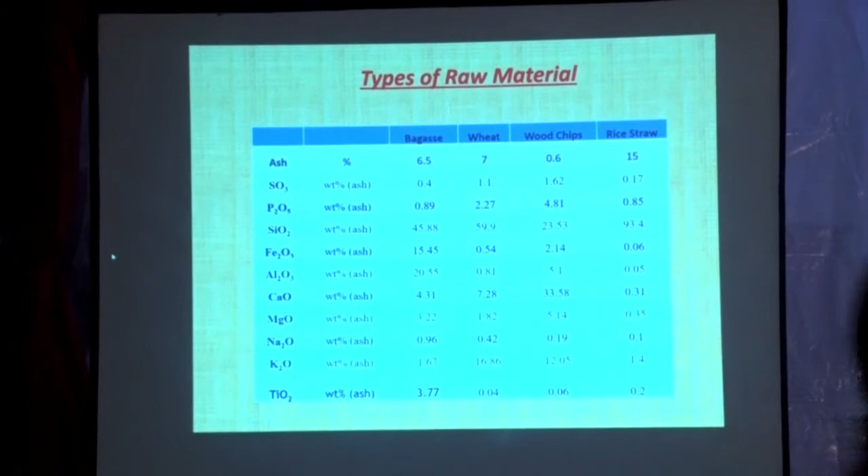These are the various types of raw material being used in the paper industry. This is the bagasse.

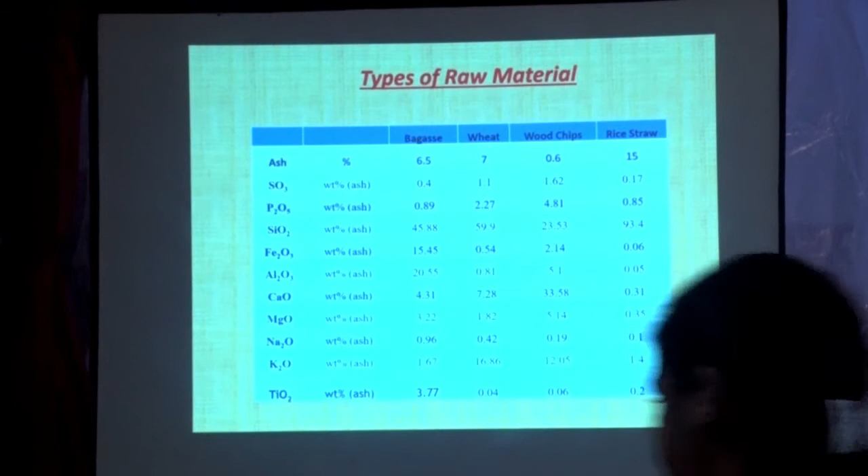So how can we judge which raw material is good and which is bad for the processing of the pulp? The lesser the ash content, the better the raw material, and the better the black liquor. But as we discussed just before this presentation, choosing a raw material is a strategic decision. We cannot think that we cannot bring softwood raw material here, because as we all know, softwood black liquor is best and good, and solid concentration is possible up to 85%. We can enjoy high steam generation from that. So we have to make the best out of the worst.

If you see the wood chips, ash content is only 0.6%, meaning 6 grams of ash content per kg of raw material. If you see the bagasse, it has ash content of 5 to 6.5%, meaning 65 grams per kg is the ash content. And if you see wheat straw, it contains ash content of 7 to 8.5%, meaning 85 grams per kg is the ash content.

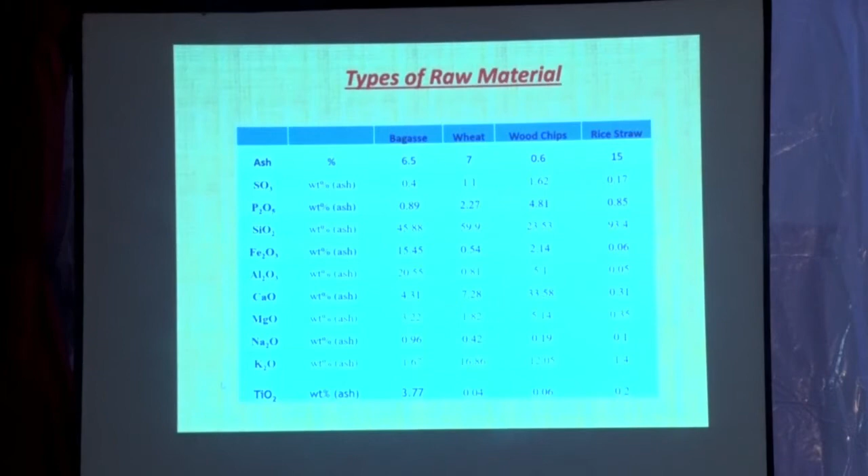These are various types of weak black liquor. Bagasse WBL TT is approximately 25 to 27 grams per liter, and in case of wood, it is 50.

RAA, this residual active alkali, in agro-based raw material it is mandatory to keep slightly high. Even in wood liquor we maintain slightly high residual active alkali so that high solid concentration is possible from the evaporator, and the goal is to keep fiber content as low as possible.

This is the Na2CO3 by Na2SO4 ratio. This ratio should be as low as possible if you want to achieve higher solid concentration from the evaporator.

This is the solid concentration, and this is the organic and inorganic content. This is the black liquor GCV, not the raw material GCV.

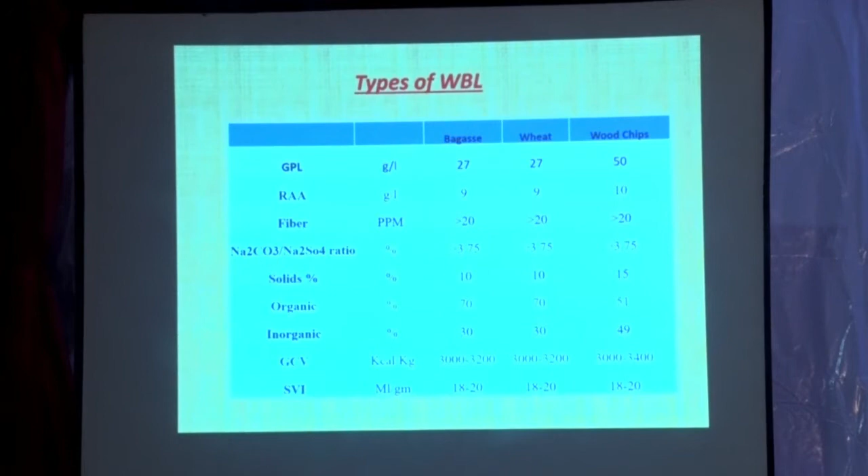If you see, usually when starting with wheat raw material, initially you get GCV in this range, but after 5 or 6 years, this GCV will drop to 2,800 kilocalories per kg. Sometimes we are surprised why this GCV has dropped, but it is nothing but due to the accumulation of dead load and non-processed elements.

Black liquor is a mixture of organic and inorganic. There is some inorganic which is desired, contributing to Na2O, but there is other inorganic which is not desired, like silica, calcium carbonate, and so many others, aluminium and other ions, contributing to undesired inorganic content.

These undesired elements do not contribute either to green liquor generation or steam generation, and must be purged out before they enter the cycle. If you are thinking of leaching out chloride from the ESP ash or other techniques available, we think it is not that sustainable, because our main objective is to get high steam generation from the recovery boiler side.

Though this is not the main subject to cover so much, it is very important for the economic viability of this whole topic. So if you see, in most mills, especially agro-based, 30% of steam generation is contributed from the recovery boiler, talking of the average paper mill.

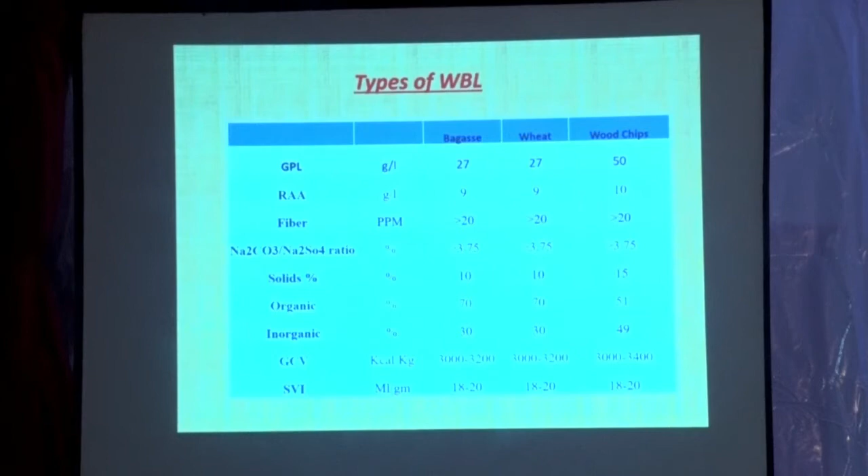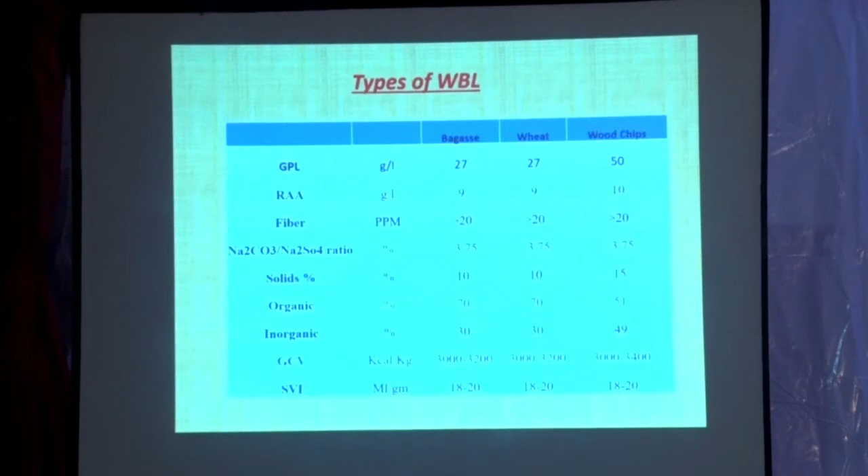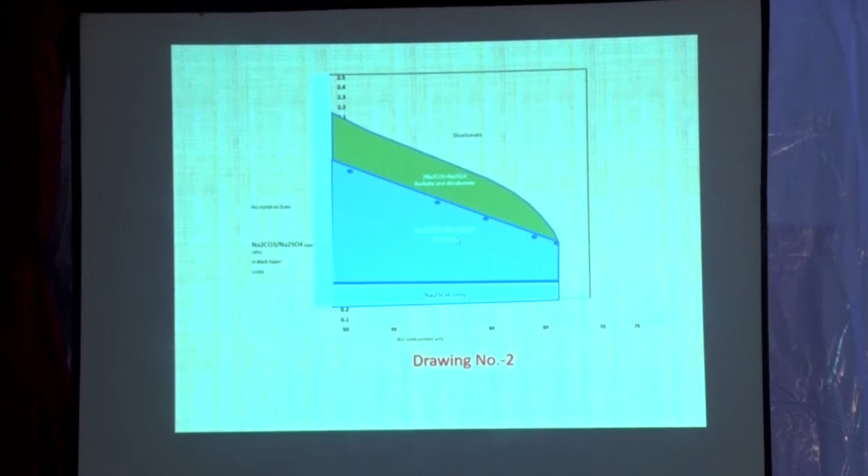So what am I saying about 95% causticizing efficiency? Most people think that if we increase the causticizing efficiency up to 95%, the obvious question that comes to mind is that the free lime will also increase.

So in the first stage, we react the green liquor with lime up to 78% causticizing efficiency. White liquor taken out from the CD filter or clarifier is again reacted with lime up to 95% causticizing efficiency. This causticized white liquor is taken out, and the underflow still has free lime, which is brought back into slaker number 1 to utilize the free lime.

So in this process, if you see, free lime is not carried toward the mud filter. Free lime is neutralized in slaker 1. So even the white liquor has this benefit.

Usually people say it is a reversible reaction and it will convert back into carbonate, but it is not such the case. If you are continuously removing the products, it won't reverse. It will only reverse when you keep it held.

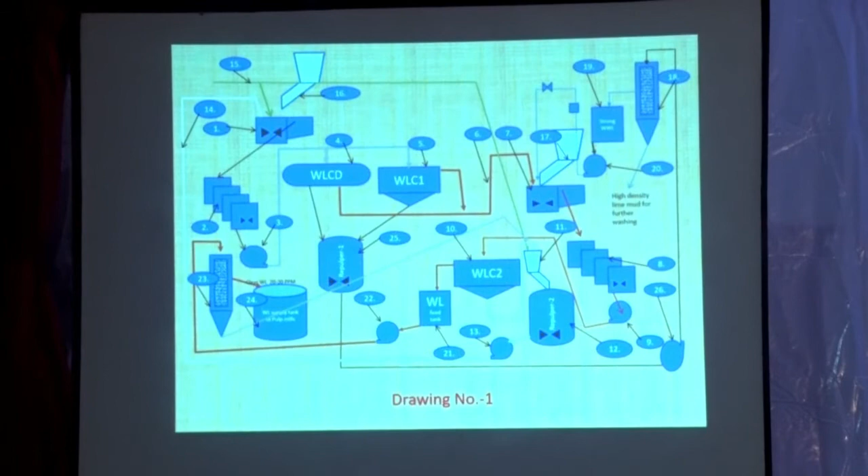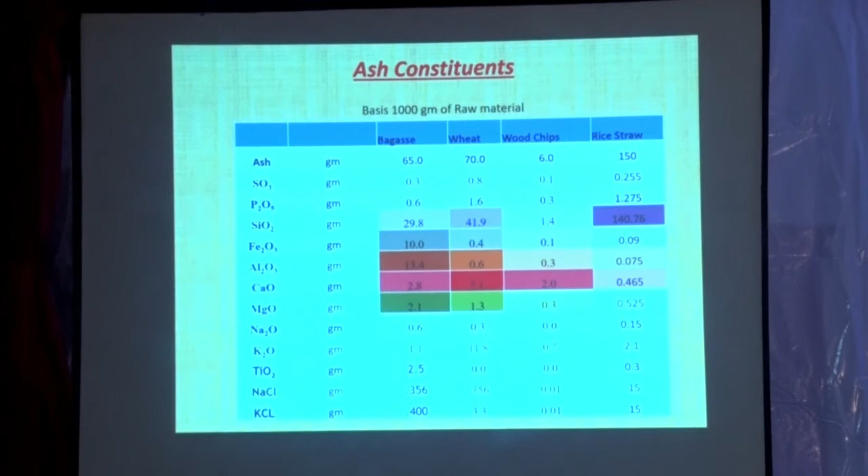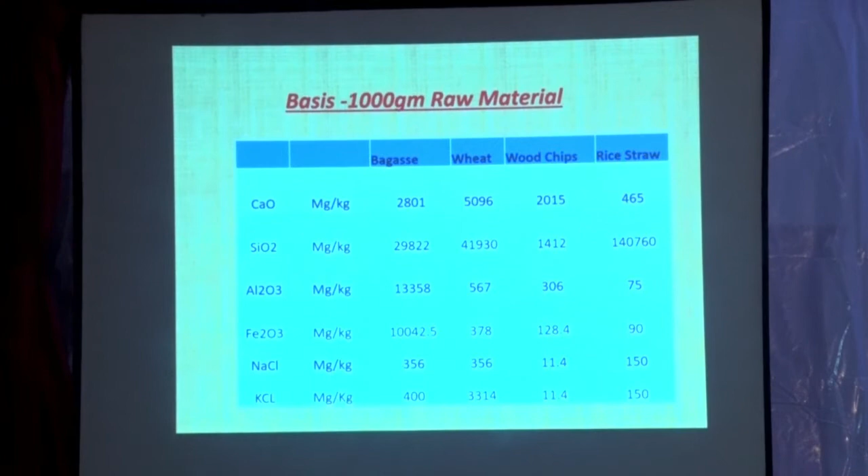Washing at 5% consistency needs water of 19 liters per kg of raw material.

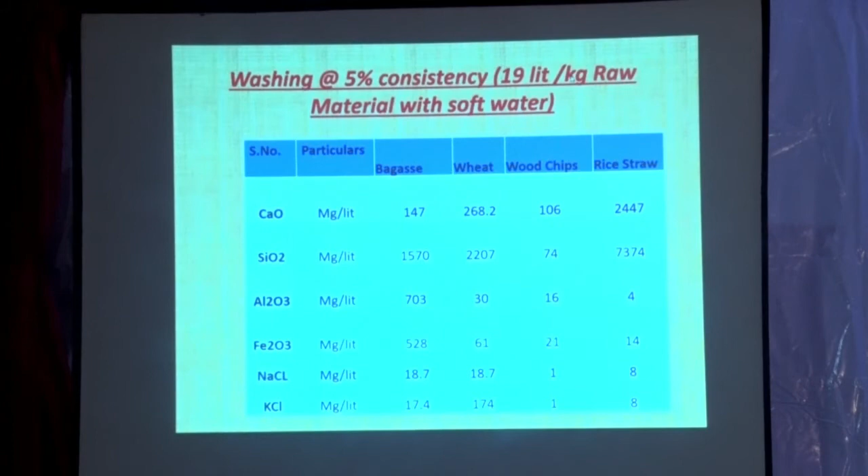Ultimate crux is that this is our process. Raw material is brought into the first separator. It has a strainer and agitation system, because as Dr. Dixit has told, calcium and magnesium have solubility even at 10 degree temperature. Ambient temperature is 30 to 35 degree, though it is a counter-current washing, the temperature will be approximately 65 degrees here. So most of the KCl, NaCl and grits, sometimes grit sand, usually come in with the raw material - it is removed here. The water comes here, raw material moves here, and water is taken here.

It is counter-current washing. In the second stage, we use weak green liquor - you can say drag wash or soda ash, DAX, we can add. We have to maintain 10 to 11 pH so as to react with all the calcium, magnesium ions, as well as chloride in the form of calcium chloride and magnesium chloride. Those reactions are missing here, but actually chlorides are in the form of calcium chloride, magnesium chloride - there are some free chlorides also. So after the reaction, calcium carbonate gets separated and is removed here before entering the digester. Because ultimately, if you don't remove the calcium content, it will go into the digester. After the digester, in the digestion, it will react with the free Na2CO3 coming in the white liquor, and it will precipitate out definitely. Better it is to remove in the washing stage so that it won't build up in the system.

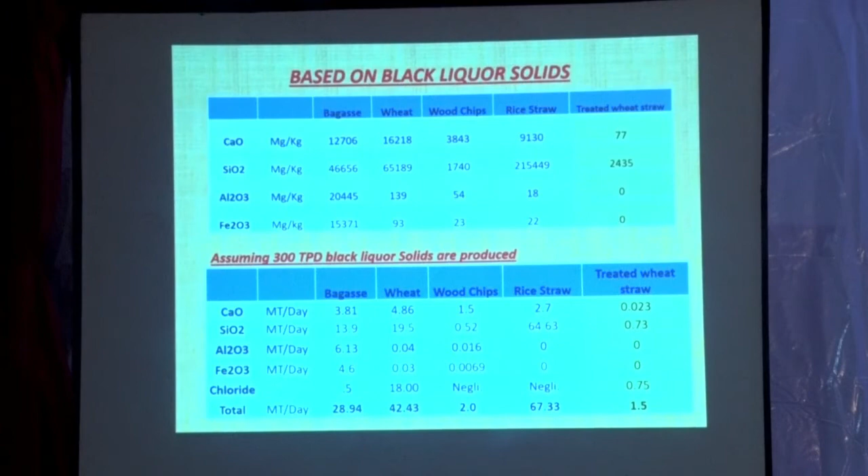Even then it is better than other raw material, because treated raw material itself is good. Except for silica, if calcium and magnesium are removed, the raw material is better, because it consumes less white liquor, less active alkali charge, and produces less solid. We are able to produce more pulp.

Ultimately, what is the worst, we have to make it the best. Because raw material scarcity is already there, and within 1 or 2 years I think there will be a ban on coal consumption totally, and we have to produce more steam generation from this renewable or this type of raw material. We have to think vigorously toward it.

We are in a patent process, we are under NDA with one of the Punjab-based agro mills, but we cannot disclose the name of the company because we are in NDA with them. Those people really want to have more discussion, and once their impact on operation comes forward to us, we will disclose all the technology.

In this process, regarding water, if you see the wet washing water - we are operating wet washing of 500 TPD wheat straw, approximately 80 cubic meters per hour water is going to the ETP. In our system, because we are using Na2CO3 and H2SO4 for neutralization, the water definitely has some COD as well as chemical content. But in our system, water going to the ETP will be zero.

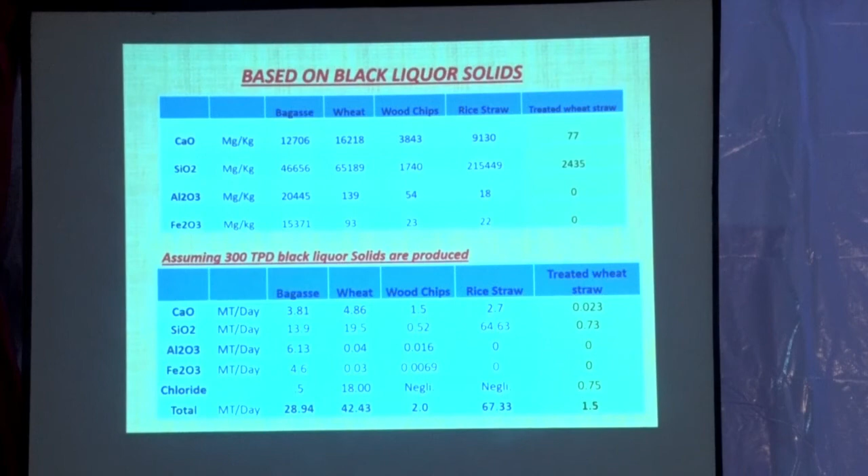This was the whole subject. I think you may have liked it.

Impact: Black liquor solid concentration is possible up to 75% easily after the treatment, provided proper RA and fiber content in WBL. Evaporator jamming frequency will be reduced, and downtime of the evaporator will reduce.

Silica in the raw material reduced to 1%, even less than 3.5%, means most agro paper mills which are thinking to run the lime kiln can now run it, because at 3.5% silica content in the lime mud, you can achieve 80% purity of the lime easily.

But I quite agree with Dixit ji, because it is just the boundary line. If you increase the furnace oil to get more purity, instead of increasing it will decrease, because the silica will bind with the calcium oxide and form calcium silicate, and you will find in your test results that we are giving more fuel but purity is getting down.

So the lesser the silica, the better the purity of the lime. I am quite in accordance with Mr. Dixit. So then clinker formation in the lime kiln will reduce, and makeup limestone requirement will also be reduced.

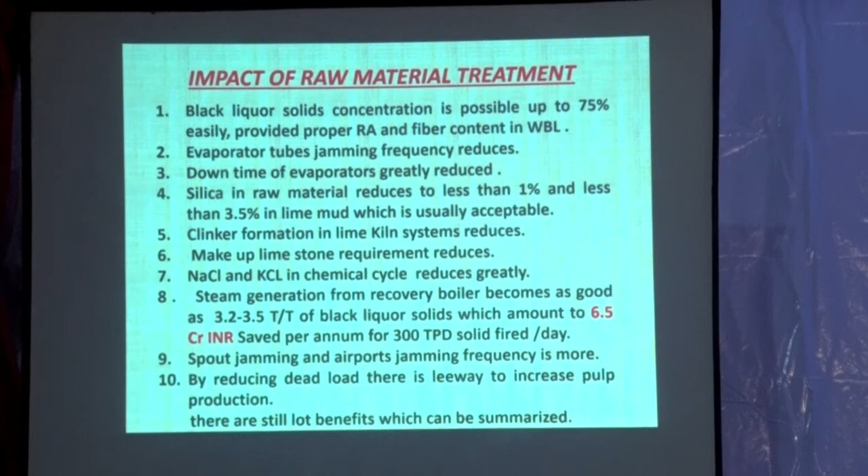Why? Because as Dixit said, if we have 4 to 5% silica and we want to maintain 1% silica in the raw material mix, how much material do we have to dispose of to maintain that silica level? Approximately 98% of the lime mud has to be purged out.

If there is 5% silica, and we have to bring it down to 1% in the raw material mix, steam generation from the recovery boiler will become as good as 3.5 ton per ton, which means this much savings.

Spout jamming, airport jamming frequency will reduce. By reducing dead load, there is a leeway to increase pulp production. There are still a lot of benefits.

If we discuss, the whole day will be complete, but the benefits cannot be fully discussed, because if there isn't calcium content and silica content, there won't be erosion. If silica is reduced, there won't be erosion on the paper machine side also. Wear and tear will be less, and with lesser calcium magnesium content, screen jamming in the brown stock washers and other bleaching areas will reduce greatly. There are a lot of points.